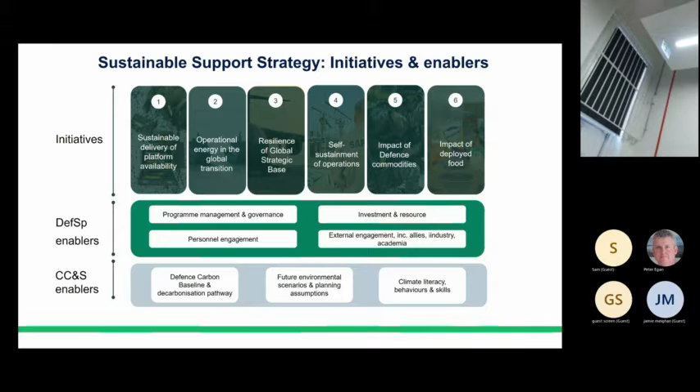I am playing to the audience here. Everyone see this?

Self-sustainment on deployed operations. This is a great one, and one that I lead directly. I hope from this conference to build some new partnerships in order to take some of these things forward into reality. We see the opportunity, and I know you all do too. We can deliver on operations.

We can remove the lengthy supply chains with high volumes of material flowing through them, and start thinking about that future base. I'm going to read a direct quote from General Wardlaw's note when he first put his thoughts down, because I think it plays to that ambition, even though we've got to have a gradual step towards it. It's no longer fictitious to imagine a battery-powered future force that recharges its own cells using deployed solar farms, prints its own spare parts, arms itself with rechargeable directed energy weapons, filters its own water, and even vertically farms its own food. And that's where ultimately we can take this journey, with quite a number of steps on the way.

So, enhancement of military capability. We know that we'll reduce our impact on the environment, of course we will, if we're using renewable energy and reducing the supply chains, reducing the number of air resupply flights you need on an operation because you're existing in a self-sustaining location. And designing in so that we're able to cope with the changing environment and reducing our reliance on fossil fuels, in a world where eventually they will become harder to get, and our assets could end up stranded if we are still fully reliant on fossil fuels.

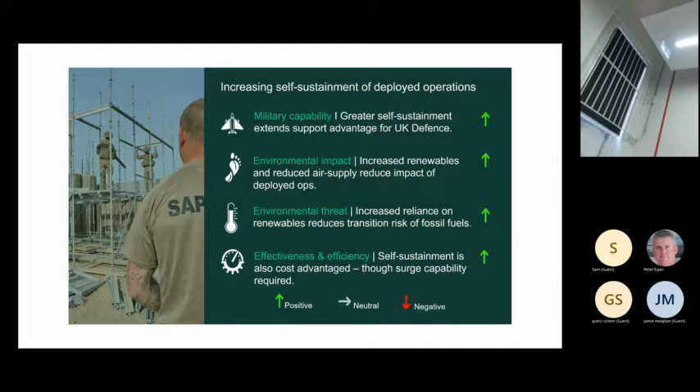So if you're mapping this against our conceptual framework through the integrated operating concept, what we did was think about where do you start with this, where do you want to begin. Starting with trying to convince, in a war fighting situation, that sustainability is your priority, you're probably on a loser. But if you map it against the IOpC framework and think about a low intensity, typically longer duration operation, perhaps at the protect or engage end of the scale, you can have greater impact over a longer period, and your threat potential's higher as well, because you're going to be in the location for longer, potentially with more people exposed.

So the opportunities in that: renewable power - I'm going to talk in a moment about the work we've done on Mali. Food and water, the idea that you're going to go for local sourcing rather than flying everything in from Holland, as I think they do for Mali at the moment. And of course, thinking about your modal shift, how you reduce your supply chains and the carbon footprint of your supply chains.

So the AADP, the Army Advanced Development Programme - we had two lieutenant colonels from there come and work in support of this particular initiative on the strategy, and I sent them out to Mali for a few days. They went and looked at all of the energy in Mali, and have basically produced a sort of minimum viable product model to think about how you compare energy, carbon and cost on an operation, and you could then provide that energy in a different way.

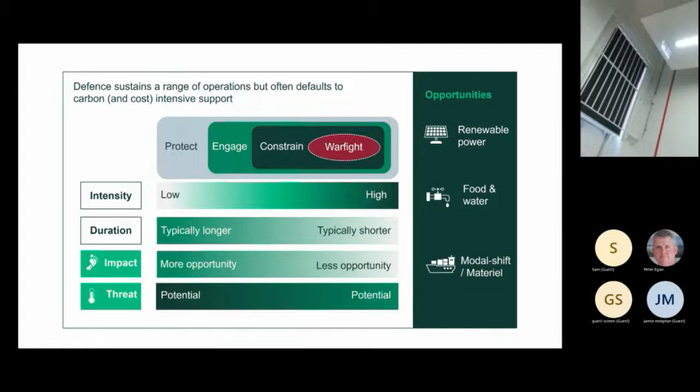So what next? We are going to write a defence operational energy strategy over probably the next 6 months or so, and we will definitely be reaching out to many of your areas for stakeholder engagement as we do that. Contract award probably in a month or so to take that forward, but my team in Defence Strategic Fuel Authority will be leading that work.

I think it's all for me about shifting the focus beyond the UK base. Now, DIO are doing a great job working on what's going on in the UK. That's probably the more mature area, where we're subject to more regulation because of UK government regulation. We're really thinking about that focus beyond the UK base. That's where defence support is at, and I know that's where many of you are at too. So we want to build on that model, that operational energy model.

We'd like to run it through Op Cabrit, for example, and compare it for a temperate environment where obviously PV isn't such a relevant solution potentially, and establish wider op energy baselines so that we can really then think about that triangle of cost, carbon, and capability.

Energy as a balanced approach. We want to exploit opportunities in the Defence Exercise Programme. We've been speaking with the ARC already and with Army. I know General Wardlaw's engaged the new CGS, and Patrick, General Sanders, also committed to trying to roll out some demonstrations of lower carbon capability on exercises.

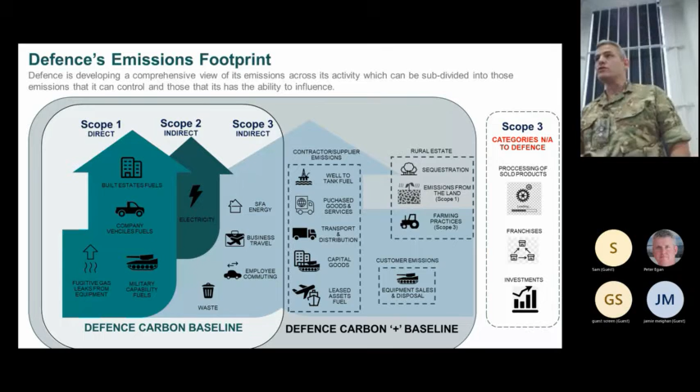One of the constant frustrations that I've had when I've approached that is the tendency of people to focus on equipment solutions and showcase projects to show we are doing something. Benefits are frequently overstated. True emissions are not really captured. And they're pushed further down the supply chain.

Sustainability is popular, and there's seemingly no end to the amount of people that can solve the problem for us. However, what I've found is that the analysis is frequently only a PowerPoint slide deep. What we really need to do is not get after niche solutions, but a plan to reduce our carbon footprint overall. The technology is out there, we just need to work out how to use it best.

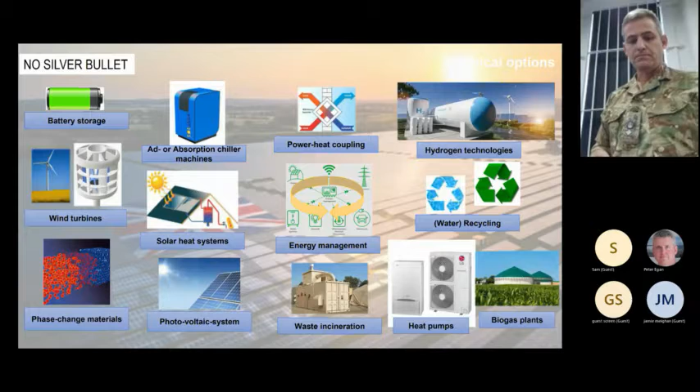We only have approximately 1,200 bed spaces available to us at this moment in time, and that's based on legacy stock. It doesn't currently meet our operational needs. So we've been relying upon the Poles and Estonians to provide tentage for us. The accommodation is somewhat austere, not suitable for the climate and not an enduring solution.

Now imagine something like this, something with good insulation, is made from low carbon materials, incorporates renewables from the start, and has a high efficiency of fixtures and fittings. Imagine the energy and the money that can be saved from greater self-sufficiency.

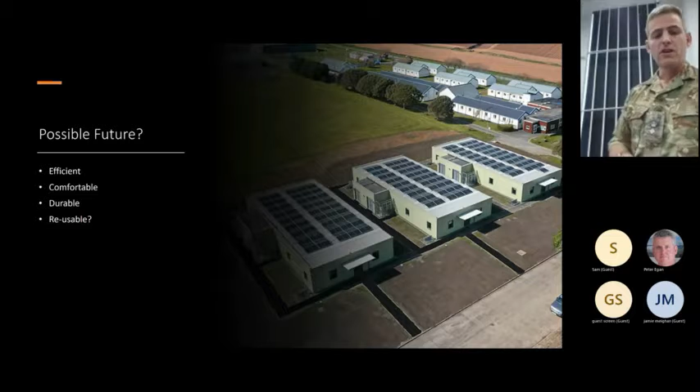So how do we get to a more sustainable estate? We need a systematic approach to focus our effort. The operational estate encompasses tier 1 to tier 3 buildings from the Arctic, temperate, and desert regions. A one-size-fits-all solution is not appropriate and will not be effective. Before we can start, we need to understand the problem.

Once we understand, we can then use efficiency savings, such as greater insulation or efficient components, to lower our carbon footprint. We can then target what is left with renewables. However, we'll be left with an irreducible minimum that we can't cut, and this will need to be offset by defence. This isn't an excuse to do nothing, though. It just means we need to apply industry best practice where we can.

Key to understanding the operational footprint has been the development of the operational carbon calculator from the AADP, which was spoken about earlier. That was aimed at being produced for defence support and has been trialled at Op Newcombe and validated by Rolls-Royce. It takes every source of emission and converts it into an equivalent CO2 value.

You will notice that there are a lot more emissions in scope than there were on the home estates. These metrics have been used to form the requirement for the next total facilities management contract in the broader Middle East. So we are already using the data from this trial that was published at the beginning of this month, using it on the operational estate.

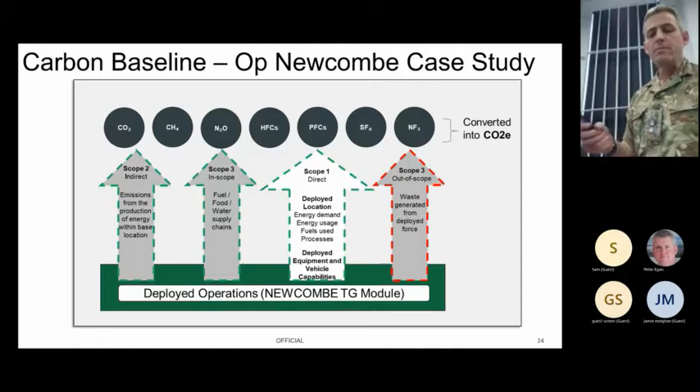On the home estate, combined heating and power are responsible for nearly 60% of emissions. But at the moment, we simply don't know what we're using on the operational estate. By capturing this data, we will know when and where we are using the energy, make people accountable for it, and drive efficiencies through better design and energy management.

This will then allow us to use every bag of tricks that we've got to address the problem. Once we understand the problem, we can find a solution that fits. Crucially, though, we'll be able to measure our effect, what we're doing, adjust, and then move forward as a plan.

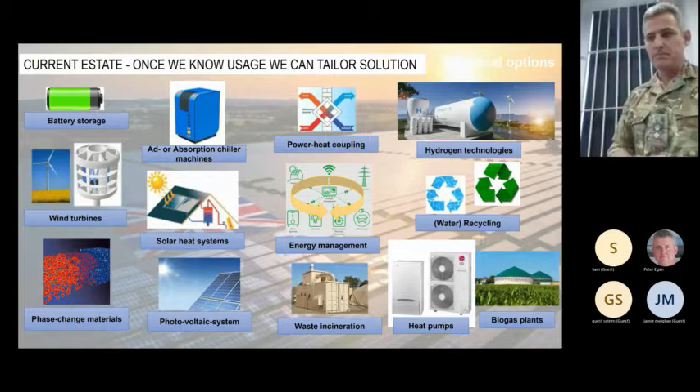We need to start building smarter too. We waste too much in military construction by not getting things right first time, and delaying key decisions such as a move to tier 2 infrastructure. We frequently make do and mend and put a sticking plaster on solutions rather than taking a long-term view. This far outstrips any benefit we can get from efficiency savings or renewables.

As military engineers, this is made worse by our extended logistics chain. By embracing modern methods of construction, which is the industry standard, we guarantee our quality with factory-produced infrastructure. It is quicker, more efficient, uses less resource, and gets the quality right first time, every time.

Crucially for us as military engineers, modern method construction doesn't have a high training burden to maintain the competency of a workforce. Fewer people will need to deploy forward, and they'll be on the ground for less time, reducing their exposure to risk and minimizing the resources needed to keep them there.

While there are many valid reasons for using locally purchased raw materials, and I admire the rationale behind building to the vernacular, it is likely that many of the locally purchased processed materials will come from China, be of dubious quality, and come from an unknown carbon footprint. The COVID crisis has taught us that we cannot rely on global supply chains as we once did.

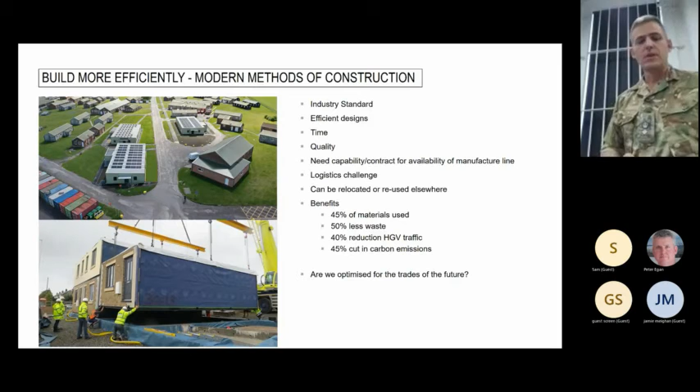So let's focus on renewables. On the home estate, they're aiming to provide 30% of peak demand from renewables. But the home estate has the advantage of already being plugged into an ever-greening grid, as nearly 50% of their energy comes from renewables.

I went out to some industry contacts to ask about the carbon and financial payback of renewables, and was told that the most likely time to pay back our investment would be around 15 years. Initially, this ruled out using renewables on the op estate.

However, recent trials in Mali have turned this logic on its head. With the added expense and logistics of getting fuel to the operational theatre, carbon and financial payback times have dramatically shrunk. With the long logistics tails of operational theatres, renewables are substantially more economically viable than on the home estate.

A trial led by the Germans has managed to financially pay back the cost of solar panels within a year, with carbon payback being achieved even quicker than that. Now, admittedly, their trial was only for 10% of their load, but estimates from the AADP study indicate that 93% of the power demands of the UK camp in Mali could be met from solar power, achieved by utilising the unused roof space within the camp.

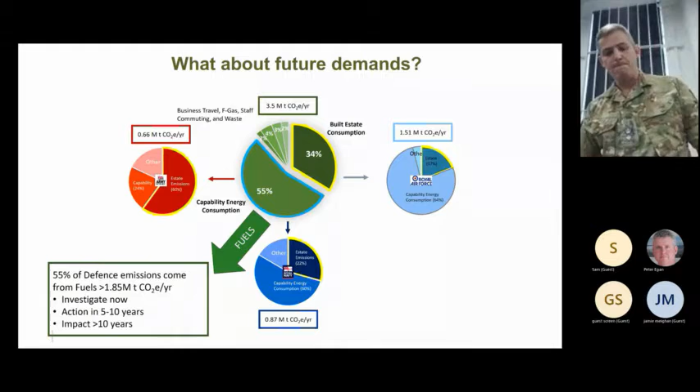Okay, hydrogen and synthetic aviation fuel. A large part of defence's carbon emissions can be directly attributed to air travel. While the CEO of EasyJet has stated he believes hydrogen is the future of flight, I'm more inclined to believe the CEO of Rolls-Royce, who says that synthetic aviation fuel should be embraced as a stepping stone technology.

Synthetic aviation fuel is manufactured by extracting hydrogen from water and carbon from atmospheric carbon dioxide, combining them to create a synthetic fuel. With synthetic aviation fuel, we have the technology to make air travel carbon neutral now.

SAF requires a lot of energy to make and is three times the cost of normal fuel, but if it is made using green energy, it is carbon neutral. Our King has insisted that every flight he takes uses synthetic aviation fuel.

Hydrogen technology in cars is some way behind electric vehicles, but offers a more credible solution for military means. JCB have developed a hydrogen piston engine for their plant that offers a glimpse into what future military vehicles could look like. Hydrogen can also be used in fuel cells, and the US military have already started trialling these concepts.

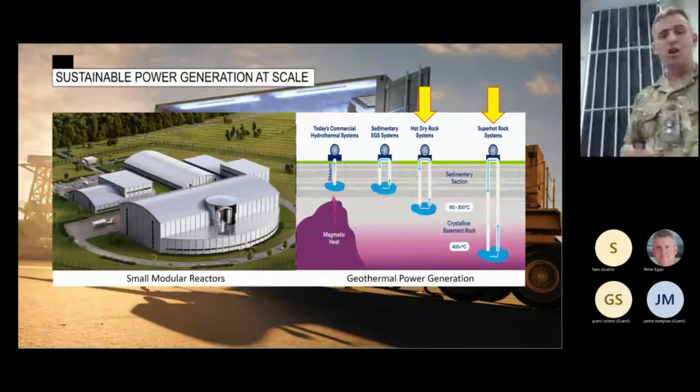We need a plan of action. The carbon calculator needs to be rolled out across the operational estate, trialling the use of renewables on a larger scale. We need to use this data to generate a sustainable estate development plan for each theatre, and a roadmap for how we get to net carbon zero. This will allow funding to be secured and a programme resourced accordingly.

We need to exploit this conference to forge closer links between the Royal Engineers Working Groups, the AADP, DSTL, and industry. This will allow us to exploit best practice and new technology quicker. Too often, defence's approach has been disjointed and confined to niche areas. There's some really great work that's been going on that we could all benefit from, and if we work together, we can achieve this faster.

Simultaneously, we need to explore contractually how we employ modern methods of construction quicker on the operational estate, so that any new infrastructure is more sustainable from the start.

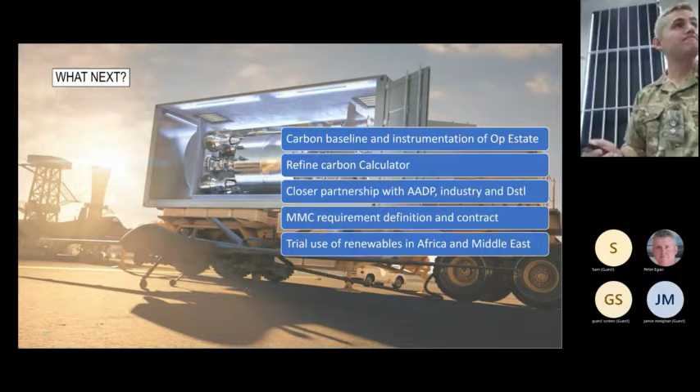Finally, I will reiterate, I am not an expert on this. I'm really looking forward to listening to the presentations here and speaking to as many of you as I possibly can over the next couple of days. Thank you for your time, and I look forward to your questions.

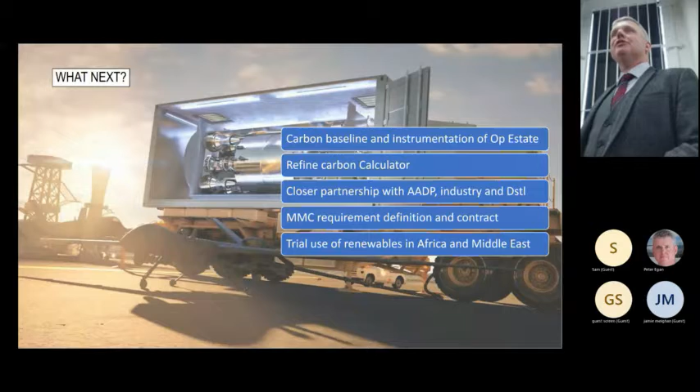Thank you very much indeed. I don't have any slides, so you'll just have to listen to me. Apologies for that. I suppose what I really want to do is give an industry response, gosh, what a title when a lot of industry is here. But I suppose the first thing I want to do is say thank you. I almost feel like just sitting down and saying job done, in the sense that things have moved on very substantially from 2 years ago when I started, when frankly, defence was not taking this seriously. I was told that my report was not necessary.

They even refused to pay for me to do it, and the army very kindly stepped in and paid for my salary while I did it, because defence just wasn't interested. I think we've moved on very substantially since then, and a huge thank you.

Also, thank you to the engineers. If you think about it, engineers typify what the military do brilliantly, which is to adapt to the environment. Go back 100 or 200 years, long before oil, and you find engineers building buildings for our troops that were naturally cool in India—high ceilings, big rooms. It wasn't to show off, it was to try and cool the rooms. So this comes completely naturally to engineers, to embrace the environment. The difference is the environment is changing faster than we realize, so we have to adapt much more quickly. And the engineers—I can think of nobody better for doing that.

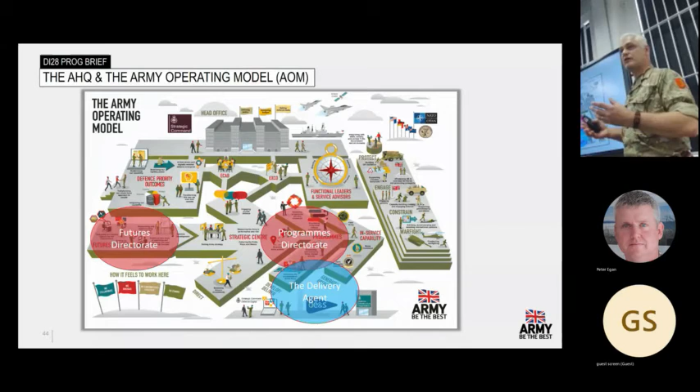And then we come back to prioritization. What is more of a priority? Is it the GMPP Boxer program, or is it maneuver power? And where do you think the political will lies, etc., with all of that as well?

So within the programs directorate, within the MilEng department of that, and this has been slightly jiggled around through the Army Operating Model Review, this is what we cover.

Now I look after two of these programs. I look after Deployable Infrastructure 28, and I look after the next generation of wide gap crossing capability. We have two other programs. Some people I've talked to in the room today have been involved with them, and that is ME Combat 28, which is the delivery, principally now what's left in it, of bridging equipment. And that's seen the delivery of the replacement for the MGB and MGCC.

If you looked at it side by side, you would not be able to tell it apart. It's because it's made of a new type of metal that isn't subject to stress corrosion cracking. And it's going to bring in a big project called Project Tyro, which is going to look at our general support and close support bridging - so the replacement for our BR90 bridging system in reality.

That is very close on the GSB side to go into contract, and although the decision has been made to go down the Boxer bridging variant, as opposed to the replacement for our armoured bridging, there is still a component of armoured bridging that sits there.

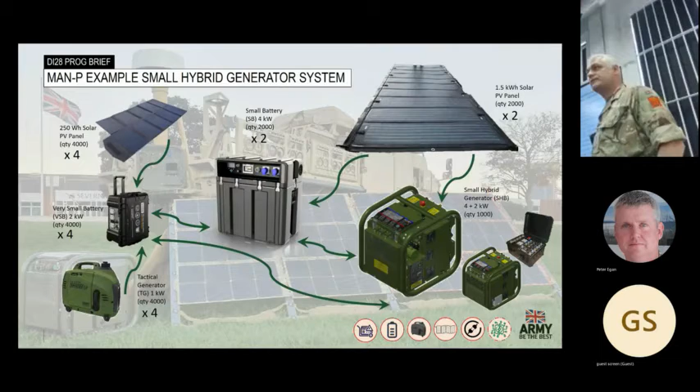We're looking at a medium-sized system to replace FEPs, but we're not looking at a system that's got 3 different generators—1 generator that you can modular, basically. So again, microgrid, smart system, probably in the region of a 20 to 30 kVA generator with built-in battery storage of about an equivalent, that then you can add 1, 2, 3, 4, 5 and scale them up. And they're intelligent, a microgrid system, they can talk to each other, they can prioritize what loads are being plugged into it, and prioritize where the power is going out of it.

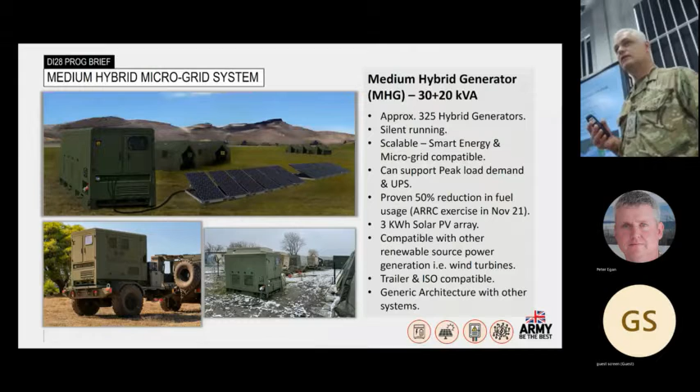And then that takes us up to a level where we're at a containerized power generator. So this is the replacement for those big Cat 320, 350 generators. Those that have deployed will quite often be aware that we have a field hospital, or a 500-man tented camp, and we have 5 or 6 of these generators plugged in, and they're running at about 30% efficiency. Well, that's not efficient for a generator. We want to run at a much higher efficiency, it burns less fuel. Or we run it at the higher end, as General Nugee said, and we burn fuel and we're just not using the electricity.

So we want to make that scalable as well. We want to make sure that's got battery storage. And there are various systems that have already been developed and used by other nations, including the Americans, that are examples we can learn from. This is the area we're a bit unsure about what size it's going to be. I think it will be 100 to 150 kVA sort of size—it might be smaller, it might be larger. And that's what we're going to get out of Kinetic, hopefully.

I've put up there reduction in fuel usage by up to 50%. On the previous slide, you saw a photo from an ARRC exercise last November, where a hybrid generator company put their generator next to our FEPS generators. We have the actual data because their generator collects it, so you can analyze it afterwards. On average, over that exercise, in November, with snow on the ground and very little PV input, it used 50% of the fuel of a FEPS generator.

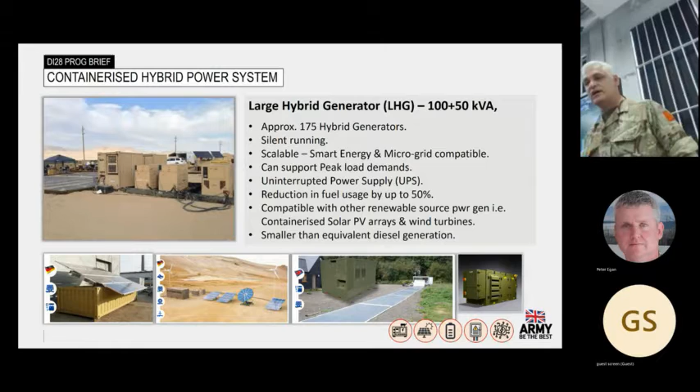Okay, moving on to maneuver shelter. I've got a couple more slides. Maneuver shelter looks at maneuver tents, headquarters tents, battle group level and up.

This project really got hit by the Commander Field Army's Innovation Fund, because everyone with crappy tents went and bought new tents under the Innovation Fund, said they were doing experimentation, didn't produce a report, didn't give us any evidence, and now they've got new tents so don't care about this anymore. That attitude went on, and it's been stopped—you cannot buy tents under the experimentation fund anymore because it massively impacted this.

On the order book, the prioritization of all projects and programs in the land domain at the moment, this dropped down to second from last, and last was static infrastructure and power, because there was no demand anymore for it.

But it extensively replaces the ITC tents we have at the moment, the steel framed ones, and it replaces the DRASH tents, the very expensive, very heavy American system that does above secret level. And it was only aimed at maneuver headquarters.

And it had nothing in it on sustainability—nothing about why we're using that type of canvas, why we're specifying that type of canvas. Why are we specifying solar shading, but put nothing in about incorporating PV into the solar shading, since that reduces the material we need and generates our own power? There was nothing in that. So again, back to square one—rewrite the requirement is where we're at with this.

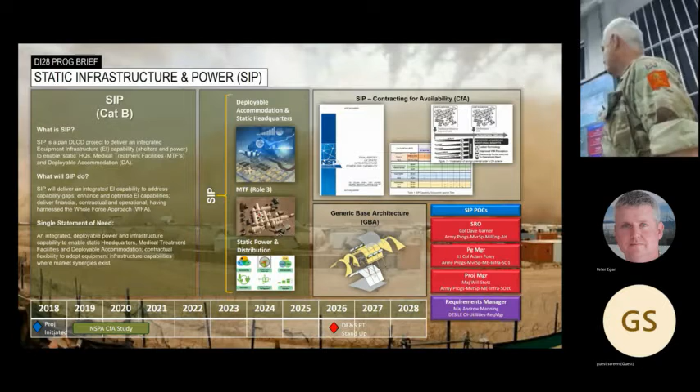Putting my common sense head on, I thought, well, that's not right. We'd had a study done by NSPA to look at whether they could deliver us through NATO partnerships, what other countries were interested. There was a lot of interest, but they got wrapped around the axle of a whole force approach and everything else, and the cost they came back with was just twice what money I had allocated.

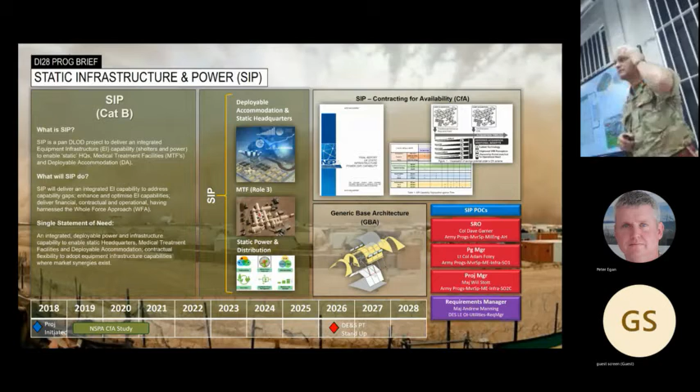So then we started looking at how we could deliver this better, because this also includes role 3 hospitals as well. Now we're looking at moving all of the shelter systems into one project, doing MOTS, COTS solutions - a tent. DCGS asked me once, why can't we just buy tents?

It took us 3 months to answer that question. You'd think it'd be easy. But to go back to basics, to work out how the whole system works, how can we just go out and buy tents - it took us 3 months to answer the question. And the answer was, we can't, which is ridiculous, isn't it, really? If we've got tents out there that meet the specification, why can't we just procure them?

If we buy the same tents of different sizes, they all interconnect together, and they all work to our DEF stand that we've written, and they're all to a NATO standard, we should just be able to go buy tents and then scale up and scale down as we see fit. That's where we're pushing towards. This project, the Maneuver Shelter Project, as it will remain known - because if we change the name again, it'll just confuse people - it'll incorporate all tentage.

That is a lesser priority at the moment than the Maneuver Power Project, because the power demand is going to hit the cliff edge. Whereas for the shelter systems, they've just put in new contracts for the replacement of ITC canvases, and they've extended the life of the DRASH contract. But we'll get after it, hopefully by 2026.

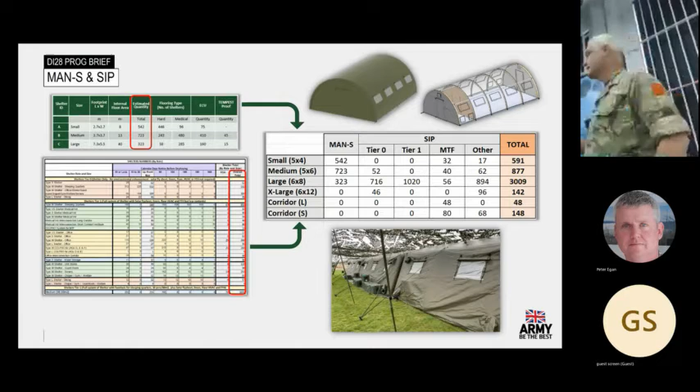So again, that's all what I've just mentioned, and there is a new DEF stand out for tentage. There was a DEF stand coming out for medical tentage as well, but unfortunately, due to organisational change, that has been parked. We're also going to look at some containerised systems on the medical side as well.

So we're looking at forward surgical units that come already fully fitted in containers, whether that be collapsible containers or solid 20-foot ISO container types - with fixed HEPA filtered air, fixed power generation and backup systems, fixed gases, and then you connect the tents to them to make the wards and the corridors and the lab facilities and everything else that goes with the hospital.

One of the reasons for that is we have to get as close to NHS clinical standards as we possibly can, and you can't do that in a tent. I think it's just nigh on impossible to do that in a tent. This speaks to - yeah, I properly nicked this one, and I was so glad you didn't use it.

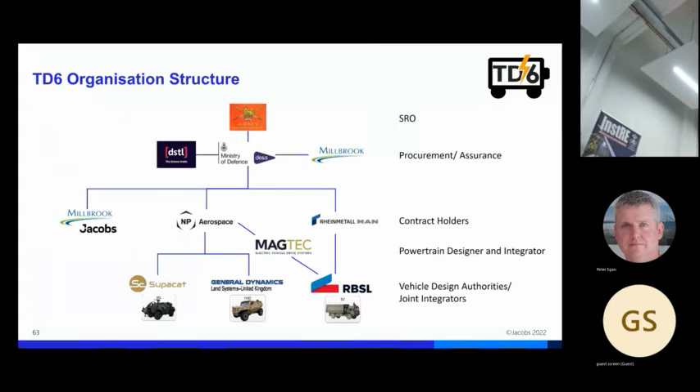So the way we approached it is we drew a rich picture of everything that would be required, what would be needed for the 5 parts of the NATO structure of survivability, lethality, etc. We looked at what had been done in past programs, and there are many from around the NATO arena and elsewhere, and then moved on to how they could be supported by the UK MOD, because there's a DLOD approach that has to be in there, which involves a lot of stuff to do with safety, and it's not just on the maintainer and operator's part, it's actually anybody who's working or operating near to a hybrid electric vehicle who may have a vulnerability, or at least needs to know in case they have.

And so what we chose to do was, rather than go for one platform, we chose 3 distinct different types of platform in the form of the patrol vehicle, the more vicious variant with the Jackal, and then the logistics support vehicle as stated.

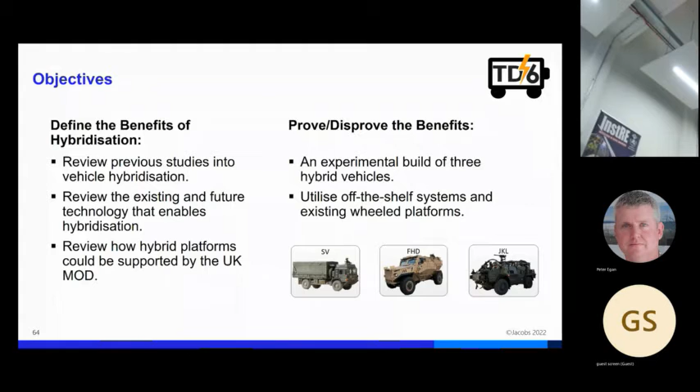There you go, back. There you go.

So from the technology side, we've now got a full roadmap mainly of companies within the UK. So what we want to do is keep all this UK based to show that if you were to go out to the commercial aspect, you could go to all of these companies, whether it's for batteries, you could go to ABC.

If it's a vehicle integrator, you could go to a company like MAGTEC or whoever else to put all this together. It's just to show how far some of these companies have come, even in the last 2 years since we started this project.

At the minute, in all 3 of these vehicles, we have standard C1 batteries, which you find on a Nissan Leaf. However, what you could probably get now is better power density in a smaller space envelope, which obviously means you could add more power if needed.

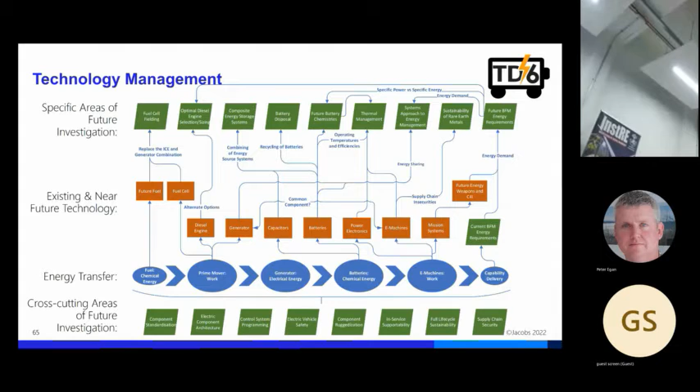So what do we mean by hybrid? From this point of view, very crude - a standard internal combustion engine.

What we've done for these platforms is basically taken out all of the power, the drivetrains, differentials, and replaced it with electrical energy. That electrical energy we've also got the potential to store in the battery or run straight off those batteries. You can see that electrical energy can then go back and forth through the power electronics.

We've also got the opportunity from the electrical energy to off-board power, which we'll talk about more in a minute - what those options are. Through that electrical energy, you've then got the potential for silent drive. If you're in a battle situation and need to get from A to B quietly, then you've got the option to do it.

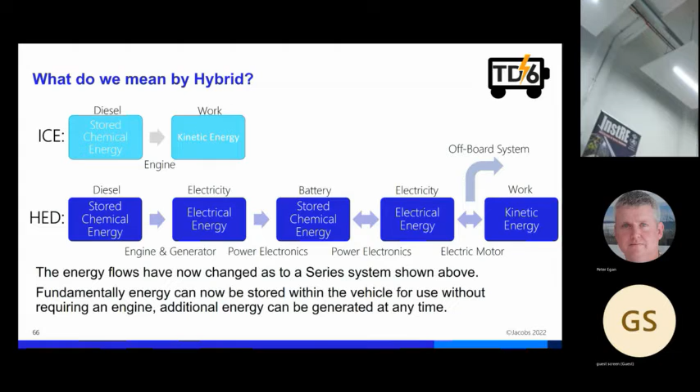We'll give a bit more on the specs of these later on. So, yeah, we have, as stated, Jackal, Foxhound, and the SV chosen for very distinct reasons to get that variance to see what the advantages of this experiment proves or disproves from different applications.

So what we've done there is we've basically removed the gearbox, put on the generator or electric machine as it is, and put in the controller unit. All the control units across the 3 vehicles are the same unit to keep commonality. From there, they control the flow from the generator to the batteries, and batteries down to the motors, or direct from the generator.

So peak off-vehicle export power at the current point we've put at 40 kilowatts, because of the stored energy behind it to back it. This is down to discussion - what do you need off the vehicle? We don't know, maybe you do or don't know, because we asked the question of many people and got many different answers. So we settled on the 40 kilowatt figure. That's where we've gone with the SV.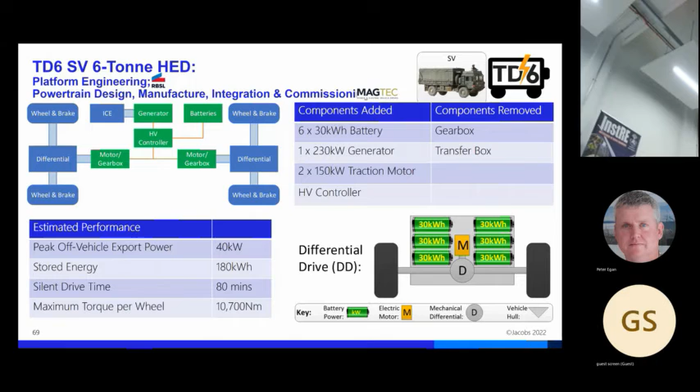So this is going into findings to date for the MAN SV. As you can see, we've now got increased fuel efficiency, approximately 20% in terms of the battlefield mission scenario. From within our Jacobs team, we're keen on pushing value plus and sustainability plus ideas onto you through the Tata framework. One of our teams pulled together the full cost savings of what could potentially be achieved, not just for the MAN SV, but for the Foxhound and Jackal as well. That's going through iterations with our team, and then that will get passed across to show you the main savings you could take from using these vehicles.

We have enhanced drivability - not only cross country, but now it's basically like driving a golf cart. There's no need, when you go off-road, to select into your semi-automatic gearbox and use the gears when driving off-road, which decreases your situation awareness because you're looking down at the gears rather than where you're going. For this, it's just foot on, foot off - as soon as you take your foot off the pedal, it stops, and it goes again. So the drivability is improved massively, especially for younger guys coming into the army who just passed a test in a Corsa. If they get put into this, at least it's just an automatic vehicle, and you can just put it down and go.

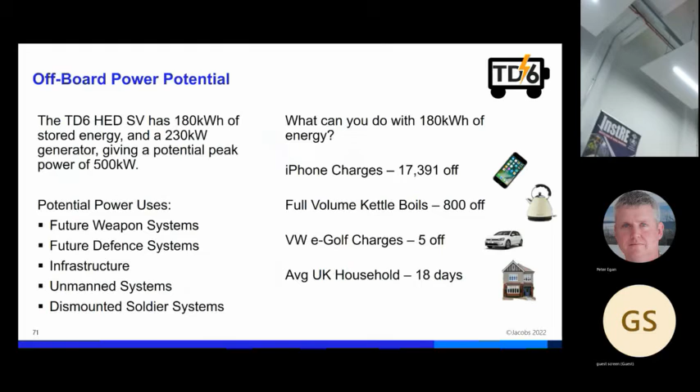If you had 2 of those, rather than having, I'll jump on to the next slide, rather than having 9 FEPs, 40 kilowatt FEPs there, you could just have the one MAN, which could do what 9 of those do. Obviously, what we would suggest is you probably have 2, so you then rotate them, just in case any updating or changes need to be made to one, you could then plug the next and plug and play, that one goes away. I think under this, one of the things we did work out was not to try and do a whole fleet, just do specific task vehicles, because then it leaves you with your standard vehicles to do whatever you wish to do with them, with QMs run, etc.

Yeah, so is that a good figure? Depends what you're taking off as a load at the other side as to whether it does that with the FEPs, don't know. But what it does do, it adds to the increased mobility of the actual SV, because everyone who's towed a FEPs knows the nightmares you get once you get into forests and things, and things start going wrong, and your abilities off-road are quite limited.

So it means that you are actually able to operate as an off-road platform within reason. You're not as good as certain others, but you're pretty much better than the original variant. I guess for anything, it gives you another option of a variant for each of these vehicles.

So if you're looking at doing midlife upgrades on these vehicles, I don't know how much a midlife upgrade would be for say one of these, but we've got the figures for what it would be to hybridize all 3 of these vehicles. So if, for example, you've got a fleet of 5,000 of these MANs, if it's potential, okay, we'll hybridize 200, you've then got another variant within your fleet to say, okay, well, we need 10 of these to go here, 10 of these to go there. It just gives you that other option, and another scenario for you to also then think about when and how you then use these.

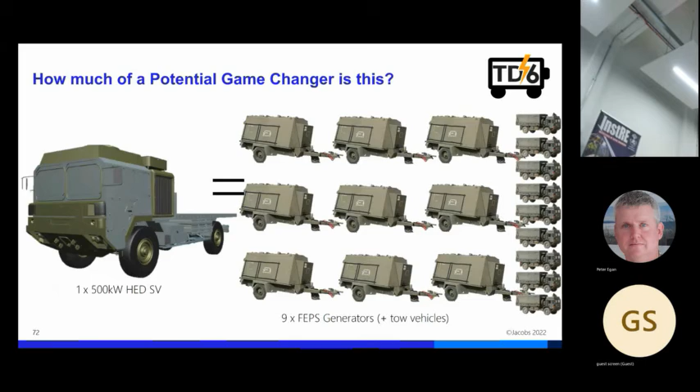So as stated, each of the vehicles can do this off. It's just the level of power they store.

The Jackal and the Foxhound store 60 kilowatt hours of electric power inside their current cell configuration. What you should remember about the cell configuration is that it's a packaging thing. What you can do is spiral develop as technologies advance, pulling out whatever's in there as that package. As Chris said, the intent for ATDU is to go from C1 to C2, which gives them a lot more power in the vehicle than we've had for doing the experiment.

Hydrogen fuel cells could be a potential option, not really looked at yet, but that's a phase 3 or 4, I would suggest, of a TD6 program.

So it's DC power, 3-phase available, 500-volt systems kicking around in there. It literally is ask the question, I need this, and the vehicle can be tailored to suit the need of what it is you need, rather than trying to get a generic power and that's all you get.

I guess you are going to have a new logistics burden from having to train in electrical components. However, even in the commercial world, they're having to go that way anyway, so there's no reason why you can't piggyback off the back of what they've already got. It might be then you've got two different sets of officers doing one or the other, but that's sort of talks going on forward, and how we would then look at potentially bringing that into service.

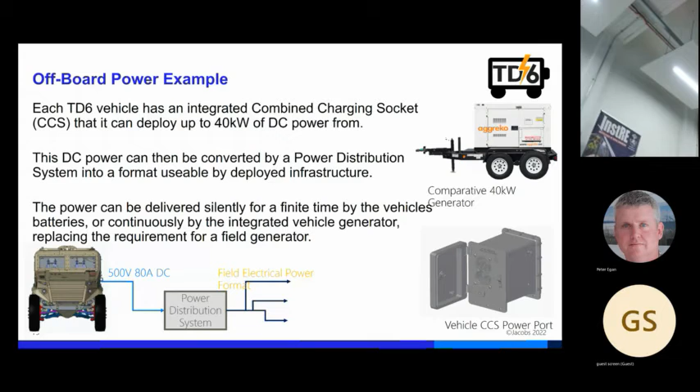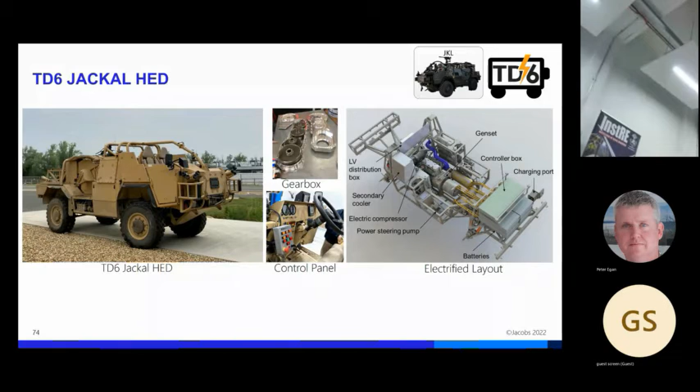It's how you're going to do it. We've had very much a circular discussion - I wouldn't say a circular discussion. We've sat down with ATDU and we've said, how do you want to use the vehicles? And the answer back is, well, how do you want us to test them? But it's not up to us how you test them. The whole point is then, once we've got that requirement from you, we make sure we can work within that remit.

So when those requirements are properly set, there's a full VBRM suite, which is very much we're able to meet, and we're not going to fall down on in certain areas.

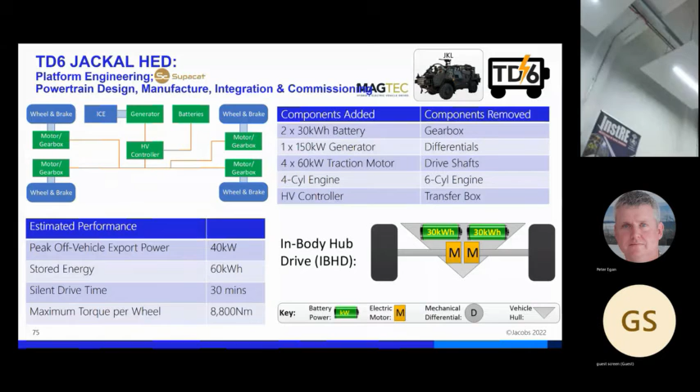We took out 5 post pallets of equipment from this vehicle, much of which is currently going obsolete, so they're scavenging across the fleet to keep the fleet going. There are other elements that are known reliability problem elements, and they have gone as well.

A point to note is that whilst they're using a diesel ICE, they only actually run at 2 settings of speed and RPM. They run at a very low tick over of just about the 1,000 mark, and at just over 2,000 when doing a heavy load charge. Other than that, they don't rev up and down - they just sit at whatever they need to be doing at the time.

With the batteries, it will go to electric mode only. They'll go down as far as 20% load left, and then the generator or engine will kick in. Going up, it will generate to 90% full and then cut at the top 10%, because all the vehicles do regenerative braking. Regen braking's quite good on the road, but not so good off-road because you're basically driving uphill all the time when off-road - you're pushing rather than just letting the vehicle go, which will stop quite quickly off-road.

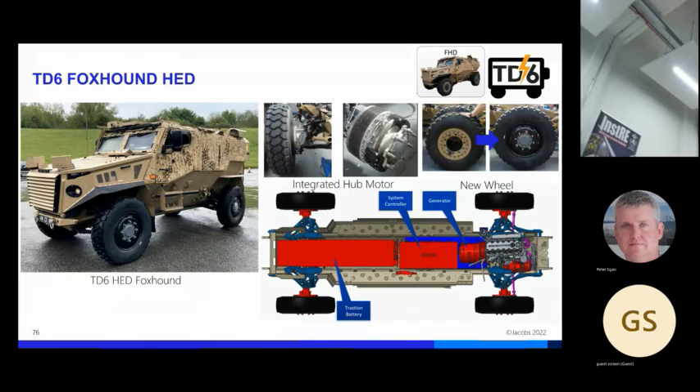But this particular vehicle has hub gearbox, hub motor drives, so that is actually all in. It's slightly bigger than the standard Foxhound wheels - the standard Foxhound's 20-inch rim, these are 22. This is to give you the increased torque required through the wheels to allow you to perform within the envelope of the original Foxhound.

Because that was one of the remits - we must not change the form of use, the capability, and the envelopes of performance of any of these vehicles. We cannot detract from them. They must all stay at least the same, if not better, in this experiment, and they have. It's as simple as they have done that. In cases like the SV and its acceleration and so forth, that is an improvement.

On the Foxhound, we've taken off the rear steer because we don't need it, because both the Foxhound and the Jackal can do torque vectoring, which means they can do neutral turns. They're capable of just turning in their own length, because it's just the magic of software that's doing that. Yeah, so last couple of slides.